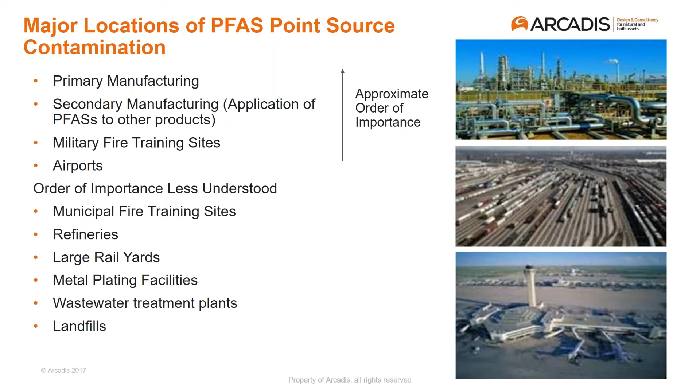The PFAS class is basically two components. The first are the perfluoroalkyl substances, meaning those compounds don't contain any carbon-hydrogen bonds—all have been replaced with carbon-fluorine bonds. We generally refer to that group as perfluoroalkyl acids, because there tend to be two main types: perfluoroalkyl sulfonates and perfluoroalkyl carboxylates. There are a couple of other lesser known varieties, but those are the two big ones. They contain a fully fluorinated carbon functional group, which can be either linear or branched depending on how it's manufactured, and then end in either a carboxylate or a sulfonate functional group.

We refer to them typically by their anionic names because they tend to be anionic at environmental pH. Sulfonates have pKa's thought to be lower than 0—they're kind of challenging to measure. Carboxylates have pKa's lower than 3. So generally speaking, they're pretty much anionic at environmental pH.

Historically, the PFAS that contained 8 carbons were manufactured in the greatest quantities—that's the C8, the octane. The third, and sometimes fourth, letter in the PFAS acronym usually refers to the number of carbons present in that molecule. So if we're talking about PFHxS, we're talking about a compound with a hexane or C6 group. With PFBS or PFBA, we're talking about a compound with a C4 group, for butane.

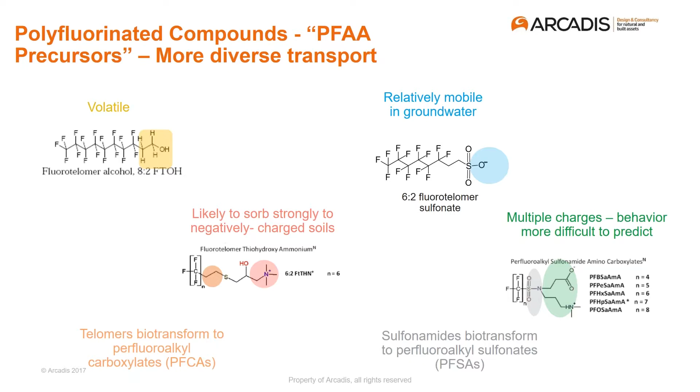So I did just want to quickly highlight how we measure the precursors in particular. The perfluoroalkyl acids are generally all pretty easy to measure on an LC tandem mass spectrometer. That's how commercial labs and academic labs typically measure those compounds.

It can be harder to measure the precursors due to that wide variability in structure, and also because many of those precursor compounds, the polyfluorinated compounds, are proprietary, and you can't buy an analytical standard for them.

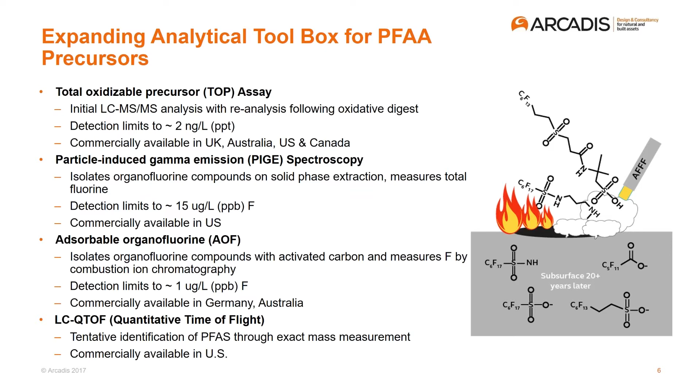Generally, the global trend is to see that more compounds are being regulated and at lower levels. Typically, we're somewhere between 10 and 100 ppt for a lot of these compounds, ppt or nanograms per liter.

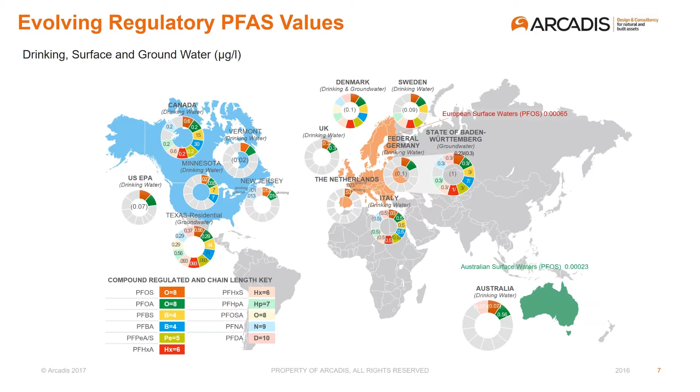So when thinking about remedial treatment technologies for PFASs, there are a number of challenges that are beyond what we've experienced with other kinds of compounds that we as an industry have tried to treat in the past. That makes it an area of a lot of academic interest. There's a lot of opportunity to develop new treatment strategies. And then it's also an interesting place to work as a consultant.

Sorry, let me just pull that thing off my screen.

So generally speaking, chemical treatment strategies have not been very effective for PFASs. Neither the carboxylates or the sulfonates react at all with conventional AOPs, with hydroxyl radical. Under limited circumstances, we've seen persulfate-related radicals be effective at treating the carboxylates. And then because these molecules are already so oxidized, sometimes there's potentially a way to work in an advanced reduction process to treat these compounds chemically, but generally speaking, these are not very viable at the field scale.

At the field scale, there's a lot of different scavengers that will react with electrons and other reducing agents before the PFASs would.

Biologically speaking, PFAAs are completely resistant to biodegradation. We have seen partial defluorination of polyfluorinated compounds through microbial processes. You maybe see 2 or 3 carbons defluorinated. That's of use when we're talking about this bioaccumulation concept, and if you can partially defluorinate a C8 precursor to a C6, that can be useful because it then becomes a less bioaccumulative terminal compound.

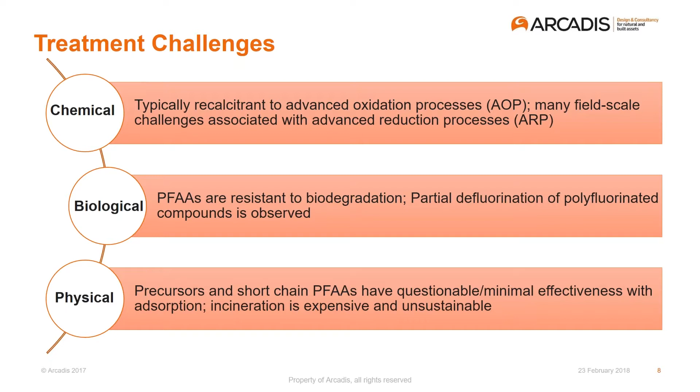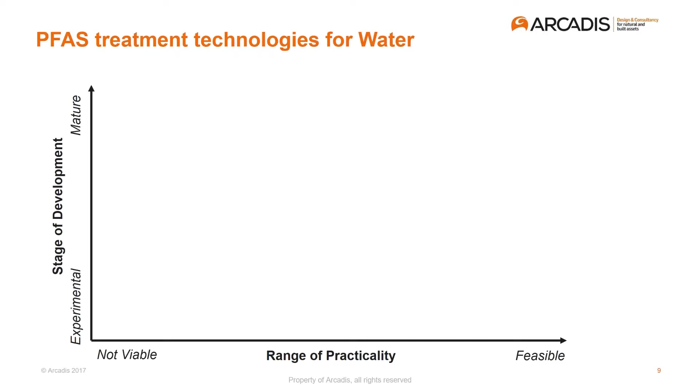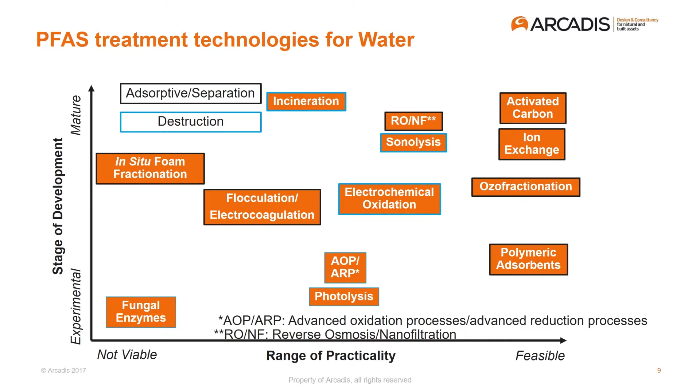This has been used for a lot of other kinds of contaminants historically, and it's a way to essentially immobilize PFASs rather than destroying them, but it can still result in that effect of protecting a water supply that we're usually interested in.

And then soil washing is another thing that hasn't been used much for PFASs, but has been used for other kinds of chemicals. It's sort of like what it sounds like, where you apply some type of a solvent or another pH-adjusted reagent to a bunch of soil, and you try to remove the PFASs through a separation process. And incineration is still often used to treat PFASs in soil, just because of the state of maturity of some of these other technologies.

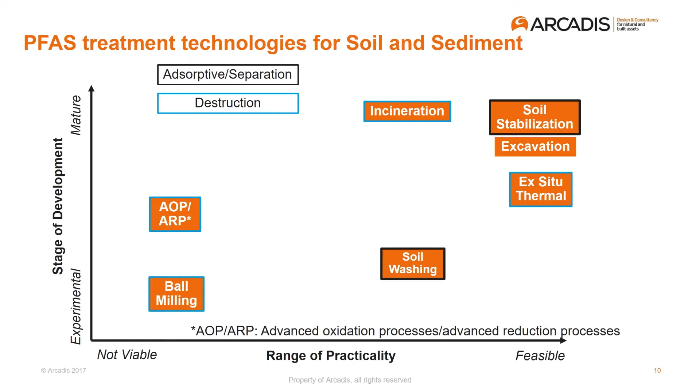SERDP is one of the main funders of research around PFAS remediation. SERDP is associated with DoD, and the main reason why they've taken such an interest in PFAS is because they have a lot of firefighting foam related contamination at different installations. So some of you may currently work on SERDP funded projects.

I just wanted to highlight what they've been funding in recent years, in 2018. And I think that gives you an idea of what people consider viable in the PFAS treatment and remediation space. Of the 11 or 12 projects funded for fiscal year 2018, a total of 7 had to do with either novel adsorbents.

There's some promising cyclodextrin type sorbents, another type called Purasorb that we'll be presenting on, and also sorbents related to ion exchange and regenerating those so they can be reused. Less of an emphasis on destructive technologies - 1 project on UV-induced defluorination, and then 3 on electrochemical-based destruction.

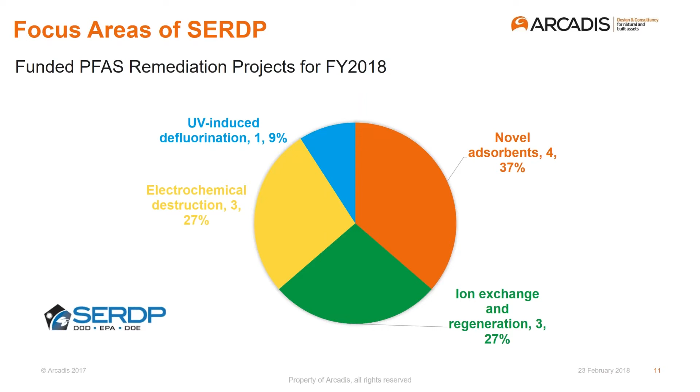Finally, before we move into a more detailed discussion of the treatment technologies, I want to emphasize that a really important part of any kind of remedial strategy implementation is locating where exactly the PFAS mass is. Locating where the PFAS mass is a very important element of the strategy. And a lot of times you need to think about what was the release mechanism.

If it was a surface release, you may have a lot of PFASs situated in your unsaturated soil zone. That can then impact the groundwater column through infiltration. If you have an aerial deposition type of release or discharge from treatment plants, that could impact more easily a surface water type of source.

One thing I wanted to point out with these soil and groundwater depth profiles, this was a site where we did a pretty detailed investigation, and we saw that while our main concern was groundwater moving offsite with PFASs and impacting a drinking water supply, most of the PFASs were actually hung up in the top of the surficial soil. 98% of the mass was actually in the top 2 meters of the site.

So even though our main focus was dealing with the groundwater, you have to consider what's going on with the surface soil, perhaps as a way to get to the groundwater treatment strategy. Every site's a little different. Depth of groundwater matters quite a lot. What the geology at the site is matters. Understanding those kinds of things can really help tailor the right strategy for PFAS treatment.

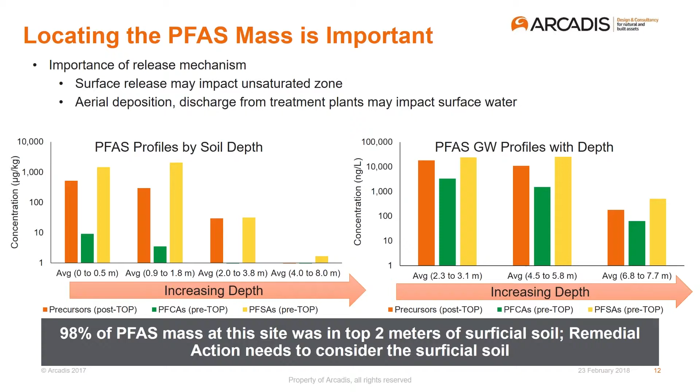So we're going to focus on 3 different categories of PFAS treatment: the first being adsorption separation, second being fixation, and the third being destruction. I'm going to talk to adsorption and separation, and Jeff will talk to fixation and destruction.

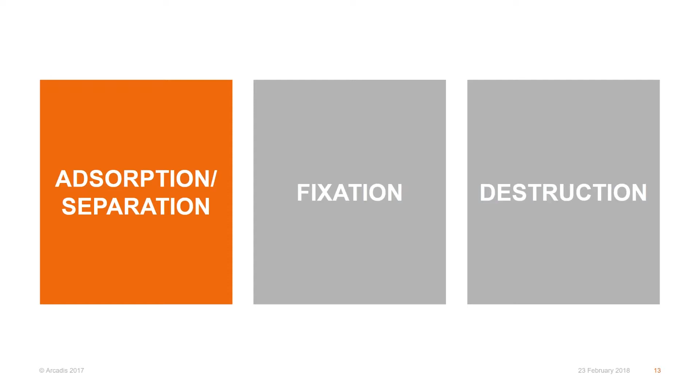So we'll start with activated carbon, which is the most popular type of ex-situ treatment strategy to use for PFASs. It's effective for surface water, groundwater, also drinking water. Point of entry systems are when you apply it in someone's residence. We know that it works really well for removing PFOS and PFOA, with greater than 90% removal even at very low concentrations, and with a 7 to 15 minute empty bed contact time.

You can potentially reactivate GAC. You can return it to the manufacturer, they can regenerate it at a high temperature, and then you can reuse it, which can improve the overall sustainability and cost.

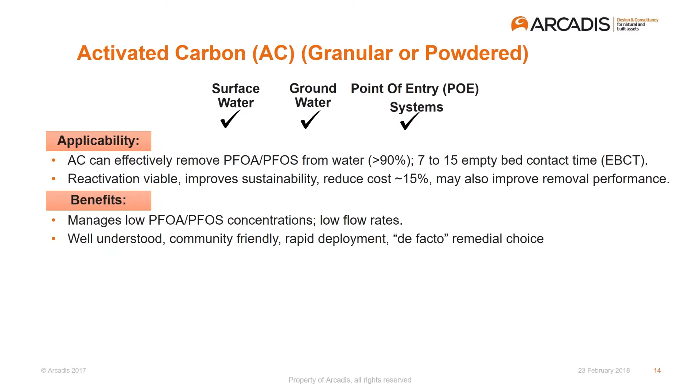Essentially, it's pretty easy to use, so it's an easy de facto choice. Some of the limitations are that it doesn't perform as well for some of the short chain PFASs, and with the precursors, it's even less well understood how well GAC is going to do. So in terms of selecting a comprehensive remedial strategy, GAC does have some limitations, and there's also competition for sorption sites with natural organic matter and other co-contaminants.

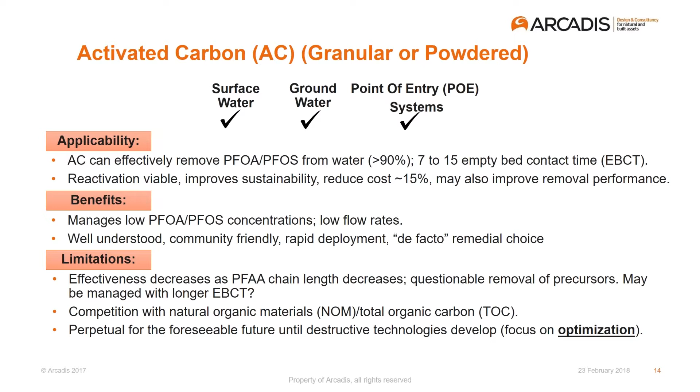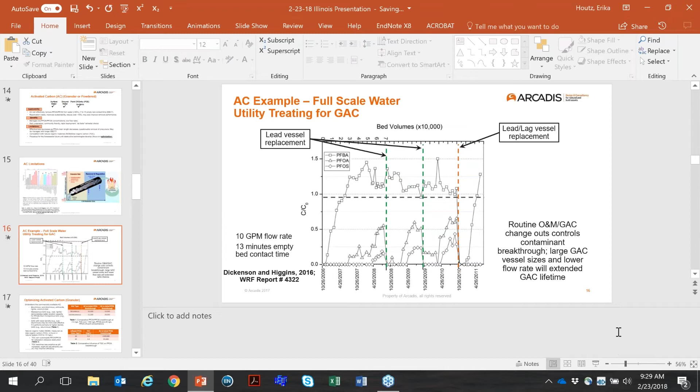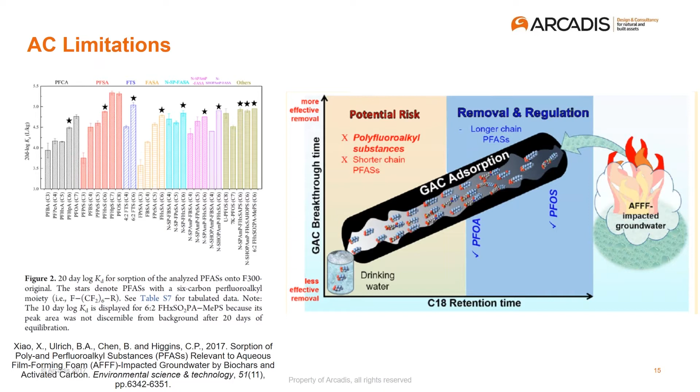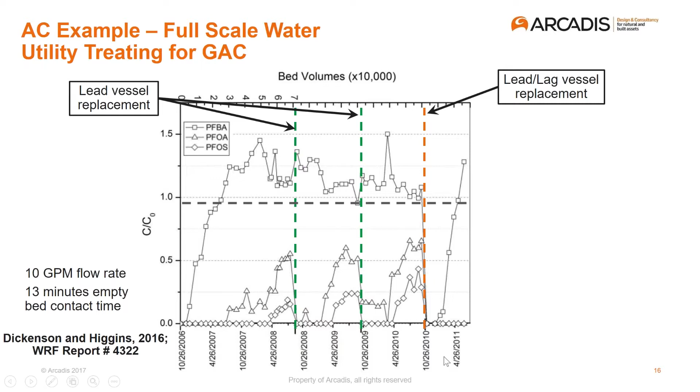Different things can be used to optimize how you think about the sustainability of a GAC treatment process. It has a lot to do with how you size the vessels and how often you're doing operation, maintenance, and change outs, also the type of GAC you select. There's different kinds of granular activated carbon available, a bunch of them coal-based, some coconut shell-based. Generally speaking, we see that mesoporous GAC performs better for PFASs than microporous GAC, so that can be a decision point to find a more effective strategy.

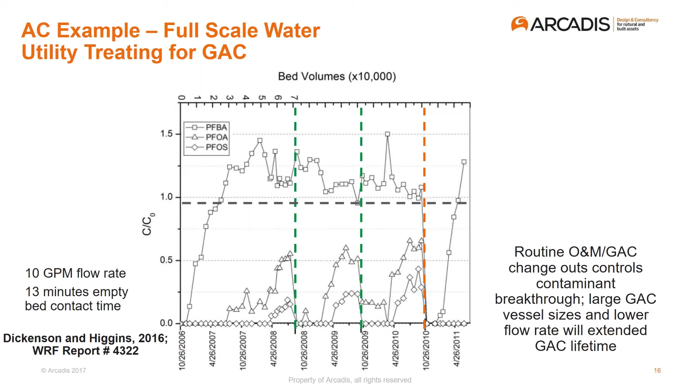Also, sometimes it's really simple things, you can purchase a subbituminous GAC. We see that bituminous and subbituminous GAC perform pretty similarly in terms of breakthrough before they need to be replaced, but subbituminous may just be more cost effective because it's less dense, and usually you buy GAC on a weight basis.

So thinking about how to control TOC going into one of these systems is helpful. You can do that through pH adjustment by increasing the pH. TOC will be less responsive to sticking to the GAC, but that won't actually affect the PFAS. Additionally, you could pre-treat through flocculation or through some type of advanced oxidation process, which would be effective towards TOC and co-contaminants, but probably wouldn't really impact your PFAS.

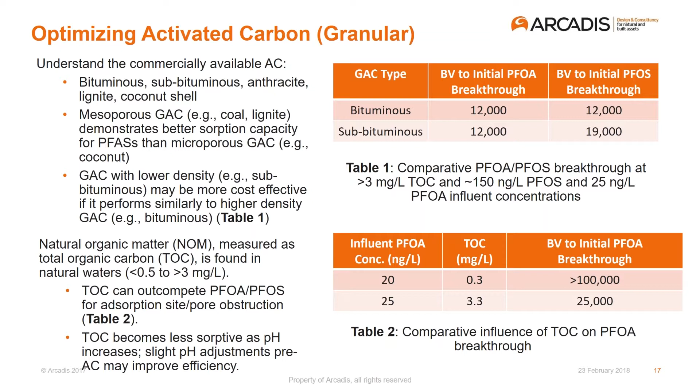Another thing you can do to optimize your use of activated carbon, if you have a really highly concentrated influent stream, you can use a PFAS-specific flocculation and precipitation technique to bring down the concentration of PFAS before hitting the GAC. The problem is then that you have a secondary wastewater or waste stream, and that really only works if you have a very concentrated sample, like more than 20 parts per billion, which is higher than what you would see at most sites where we're dealing with this. So it's just thinking about what your treatment train looks like, how to extend the longevity of what you've chosen. In this case, we've been focusing on activated carbon.

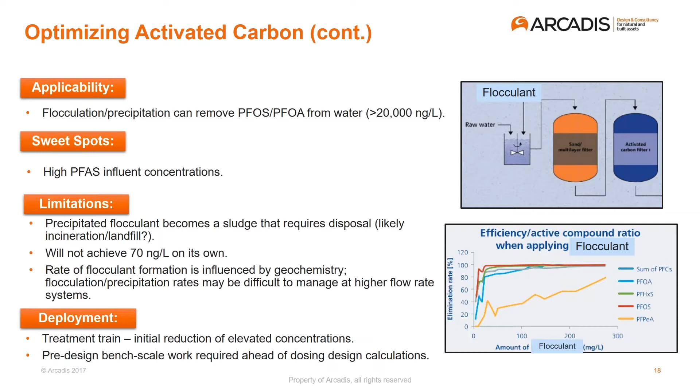Another thing that's really more of a practical, functional idea: if you're focused on controlling costs for treating for these compounds, sometimes simply by investing in a higher capital cost, so a 10,000 pound set of GAC vessels versus 2,000 pounds, you can have a similar lifetime O&M cost, which can be useful, particularly if you're trying to deal with a system that's in a remote location or where it's difficult to mobilize people to get to. It can be useful to invest more upfront in a larger system that requires less frequent change-outs.

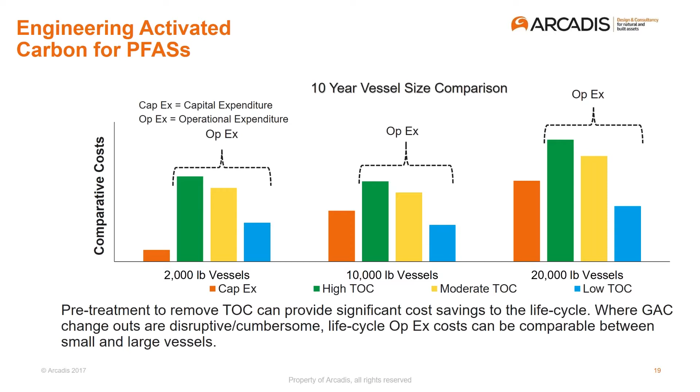So soil washing is another separation technique used for soil treatment. Generally speaking, this is only something you would want to deploy if you had a relatively large quantity of soil you wanted to treat. There's different things you can use to do soil washing. You can use a surfactant that could potentially desorb PFASs. You could use a solvent such as methanol. Again, there's variability in how different PFASs sorb and desorb, so getting everything at once can be a bit of a challenge. And then you do have a waste stream that requires treatment after that, but that can be a more concentrated waste stream, which is often easier to treat from a destructive point of view than low concentration waste streams.

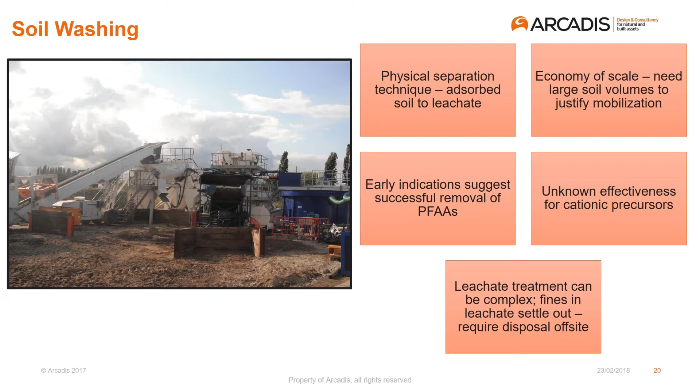Another type of separation technology that's used is typically anion exchange. That's because PFASs are typically anions. Even though the technology sounds like it's all about ionic effects, actually the hydrophobic interactions matter quite a lot. So the longer chain compounds tend to perform a little better with removal by anion exchange than the short chain ones, although this can be a more effective way to treat ionic PFASs that are shorter through that additional ionic interaction.

And so typically where we're seeing anion exchange resins used is a polishing step after GAC treatment. Anion exchange resins tend to be quite a bit more expensive than something like activated carbon, so they can be used to get down to really low treatment targets that some people are trying to achieve. They also have smaller equipment footprints, lower empty bed contact times, so they can be a little more versatile in that way to deploy as a full-scale system.

But similar to GAC, sometimes you have to think about optimization, and depending on what other kinds of anions are present in your source water, that may be a limitation towards being able to use different kinds of anion exchange resins. One thing that appeals to a lot of people about using anion exchange resins versus something like GAC is that if you can desorb the PFASs using a solvent or a pH adjustment effect, you can really extend the longevity of the resins for lifetime of treatment. But again, you have a waste stream you have to treat.

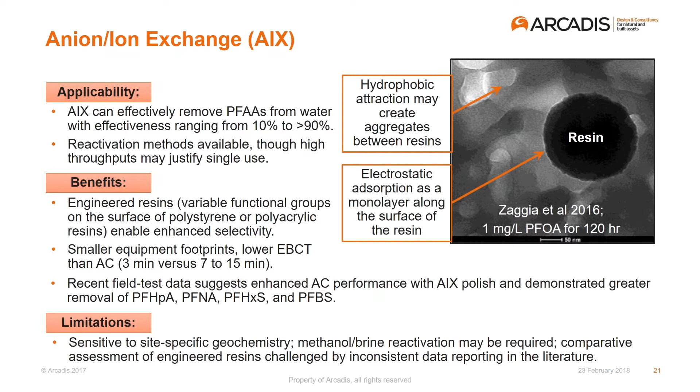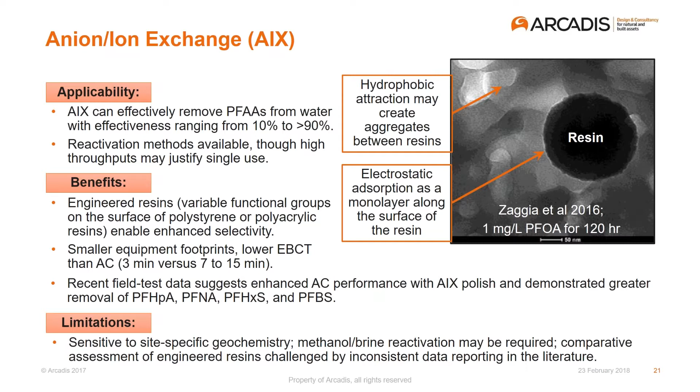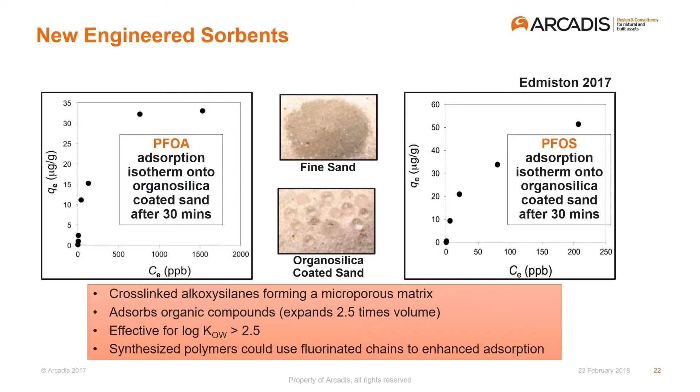You can also modify this material with different fluorinated functional groups that can improve its affinity for PFAS. This is a focus of a funded project we're working on now, trying to improve this sorbent for removal of PFAS. Part of that is also focusing on regeneration potential of this sorbent. That's an area of really active research, just trying to understand how you can improve the longevity of these different kinds of materials.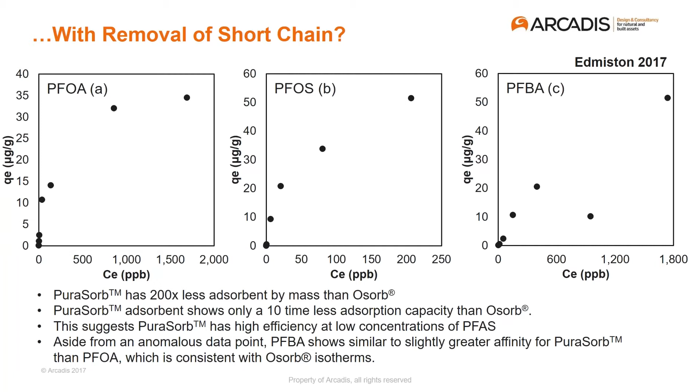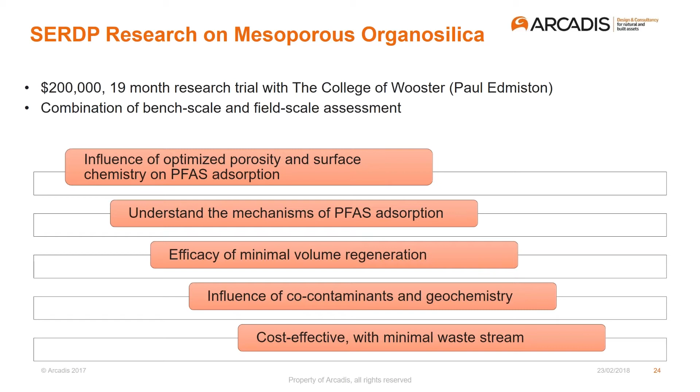Another separation technology we've used predominantly in Australia is a concept called ozofractionation. We've been using it with wastewater, so really high organic content and a lot of other co-contaminants. Ozofractionation was originally not designed for PFAS, but for other kinds of contaminants such as hydrocarbons that can actually break down with ozone.

But the nice thing about using ozofractionation is that by exposing a waste stream to ozone, you get both destruction of your co-contaminants, and then you get a bubbling effect which works really well to separate out PFAS that tend to be surfactants. By separating out surfactants into the air phase or bubble phase, you create a concentrated waste stream of PFAS that you can then treat separately.

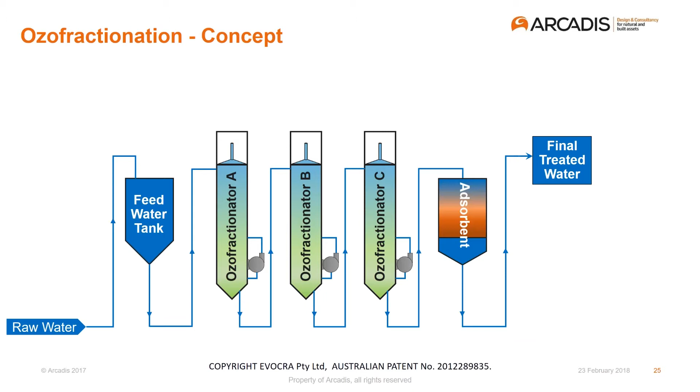So the feed water goes through 3 different ozofractionation tanks. Each time the waste stream comes out at the top, the airy waste stream, and then the treated stream, which goes through each of these different fractionators, is finally treated with an adsorbent to get down to really low levels of PFAS to meet discharge requirements. So you end up with a concentrate, some spent media, and a foamy sludge on top. That's the concentrate. Then also your final treated water.

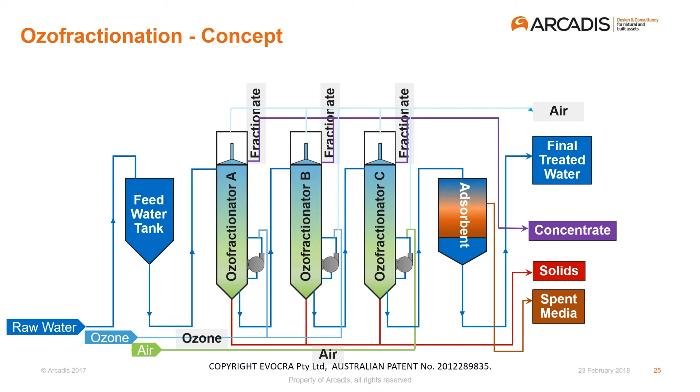So we got this to work in partnership with a company called EVOCRA at the lab scale, and then brought it to the field scale to treat 3.6 million gallons of water at this particular site.

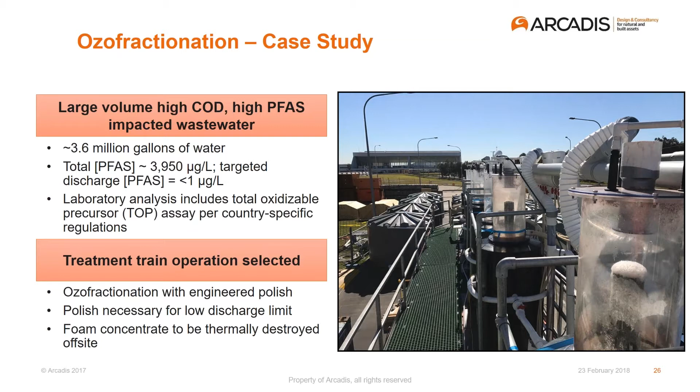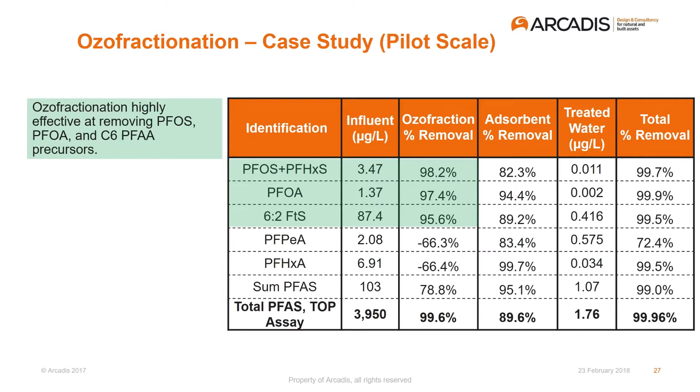So this was the removal we achieved. In the ozofractionation stages, we were able to achieve between 95 and 98% removal of a lot of our target compounds - PFOS, PFOA, 6:2 FtS. Ozofractionation did not work as well for the short chain compounds. You actually see net production, because the ozone converts some of the precursors in the process to these short chain compounds. But by applying an adsorbent like Osorb or PuraSorb in the polishing stage, you can get additional removal to get much closer to your target discharge value.

So in total, we saw 99.6% removal of total PFAS as measured by one of those alternative techniques, TOP assay. In the ozofractionation stage, an additional 89.6% removal from that adsorbent stage. We were able to take the influent to effluent treated water from about 4,000 micrograms per liter to about 2. This was at the pilot scale.

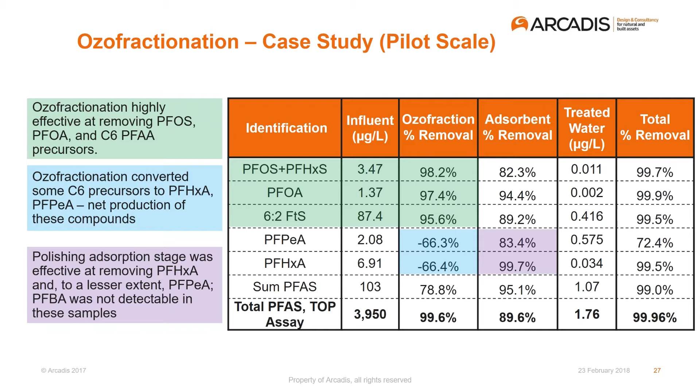With the full scale water, which was not quite as contaminated as that pilot scale water, we were able to get below our discharge limit of 1 microgram per liter, or 1 part per billion. We replaced the polishing step in the full scale system with nano-filtration just to ensure we could meet our desired discharge limits. We ended up with a concentrated waste stream that was about 0.5% to 2% of the treated water volume. By really concentrating those PFAS into a much smaller waste stream, that makes it more viable to start using some of the more expensive destructive techniques that work much better cost-wise at a more concentrated level.

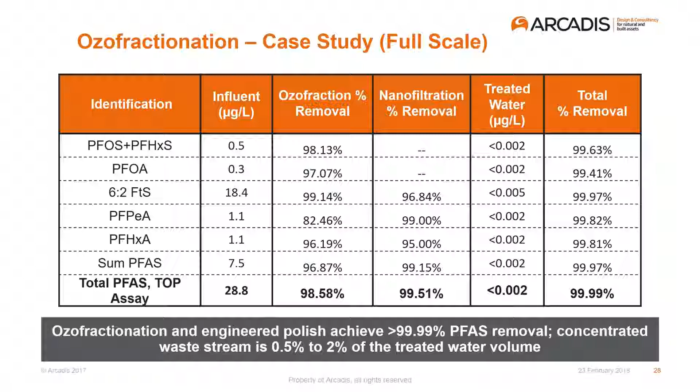I'm going to talk about fixation and destruction-based technologies for PFAS. A lot of what I'll present is conceptual, which is why we're evaluating it, because there hasn't been much action by industry to actively remediate these compounds yet. A lot of what Erika talked about are stopgap measures put in place to address immediate concerns to public water supplies. This next section focuses more on what people are thinking about doing to address this problem. Right now we're catching it and building research as to what we can do. The first technology I'll talk through is fixation.

One way to distribute them effectively is to destroy the soil structure with in situ mixing, called soil stabilization, using a variety of tools. There are different technologies out there, variations of augers, excavator arm attachments, and things like that, that destroy the soil structure and ensure we can deliver the reagent throughout. Potentially solidification as well.

Some areas we're looking at treating are abandoned fire training areas that don't have much traffic, so it's not necessarily required that the soil be immediately returned to load-bearing capacity. The solidifying agent, like Portland cement, gives unconfined compressive strength for immediate use after treatment, but that may or may not be necessary. It's important because some of our research looks at how the aluminum silicate chemistry associated with Portland cement influences the fixation strategies.

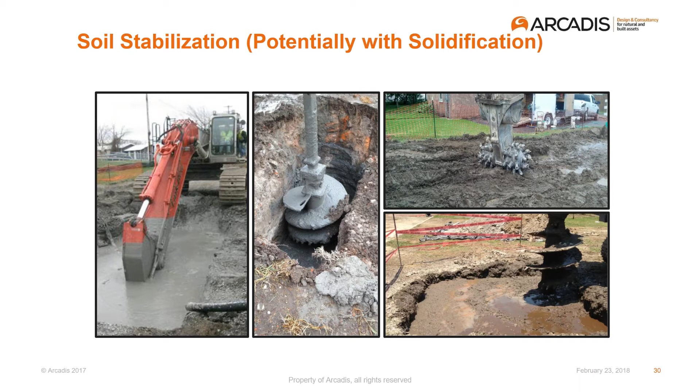From a leachate perspective, if these fixants were mixed into an aquifer, into a soil water slurry, we would effectively mitigate the leachate from the soil to the water. So you're not destroying them or removing them, you're locking them in place and preventing them from getting into groundwater, which would become a mobile problem. It's about managing the risk and taking the receptor out of the equation, because people aren't interacting with these soils.

They're restricted under institutional controls, or a lot of our clients are considering using soil stabilization in a fire training area and then building another fire training area on top of it, using a different variety of foams that don't have the fluorosurfactant. But the real question is how effective this will be long term. If you talk to vendors who provide these materials, they advertise 10,000 years of longevity, based on simulated leachate testing. A lot of the commercial leachate testing, the synthetic precipitation leaching procedure and the toxicity characteristic leaching procedure, SPLP and TCLP, were designed historically for metals leaching from landfills.

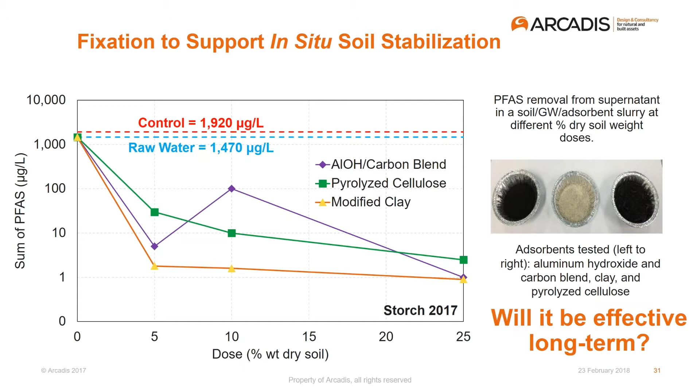Typically you don't think of soil stabilization with time series data. It's generally set up so you demonstrate viability in bench and column studies, establish a technical quality control and assurance plan to make sure the field scale mix is identical to the laboratory mix, and that's your proof of concept—you don't further sample the monolith. That's typically how ISS systems work. You may monitor groundwater for subsequent leachate, but you generally don't go back into the monolith to disturb it.

We're going to do that because in this instance it's not a destructive-based treatment—we're trying to see if we've mitigated leachate. So we'll mix in whichever stabilizing agents we see fit based on laboratory bench scale work, and run four sampling events over 3 years, generally annual sampling plus a baseline event. We'll look at PFAS in soil and groundwater, and use Erika's method, the total oxidizable precursor assay, to look at how precursors are influenced by adsorption.

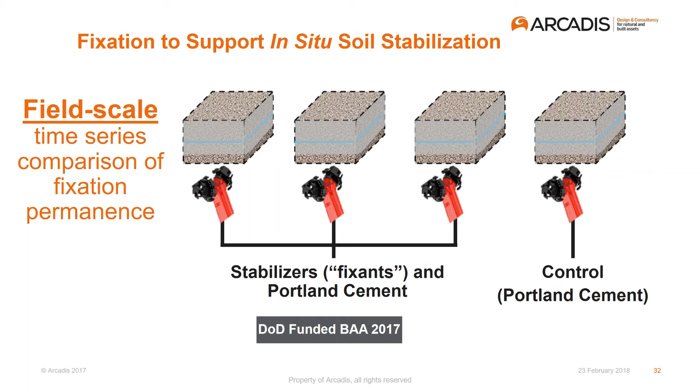Organic carbon is a big factor in adsorption, and it competes with the fixants we're mixing in. We'll also look at target analyte list metals, grain size from a geotechnical perspective, moisture content, and other major anions and cations in groundwater that can influence the adsorptive nature and fixation ability of the fixants we're mixing.

And we're going to use a slightly different version—not TCLP or SPLP. We're using a sequential leaching test called LEAF, method 1315, developed with Arcadis and Vanderbilt University, and since commercialized. It uses a circumneutral leachate extractant to run intact monoliths through a series of leaching steps. It's the most accurate way to represent what the field scale will actually be subjected to over time, and doing it at circumneutral pH gives us a worst case scenario from a PFAS leachate perspective.

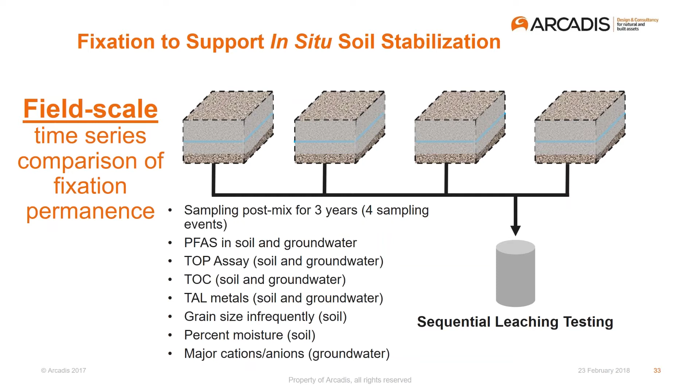I'm going to end here with some discussion on destruction. Now with destruction we start to get into somewhat more science-fiction-y stuff—technologies that may have been evaluated for hydrocarbons or CVOCs back in the 90s and 2000s, which people kind of laughed off because of their energy-intensive nature. So I'm going to talk a little bit about them.

The first one I want to talk about is the one everyone asks about: why doesn't ISCO work? Why doesn't chemical oxidation work? ISCO is the big hammer, one of the most powerful chemistries we can generate in bottles and at field scale, but there's minimal promise with ISCO. I jokingly refer to it as NISCO or ISNO because it's not applicable, and I'll explain why. But some literature suggests that under pretty extreme conditions of generating advanced oxidative processes, those radicals that perpetuate radical mechanisms may be effective on the perfluoroalkyl carboxylic acids Erika was talking about earlier.

But maybe not so much on the sulfonates. However, some of the aggressive chemistry necessary to destroy the PFCAs causes acidic pH, and that acidic pH can start to infringe upon the acid dissociation constant of the perfluorocarboxylic acid. Once you get down around pH 3.5, you can start to protonate some of the perfluorocarboxylic acids, and that increases their volatility. So are you really destroying them, or are you driving the acidic conditions so low that you're driving them off via volatility?

I think that's an area of study and research in the literature at the moment. There's certainly a potential to transform precursors to perfluoroalkyl acids via ISCO—that's the whole concept behind the TOP assay.

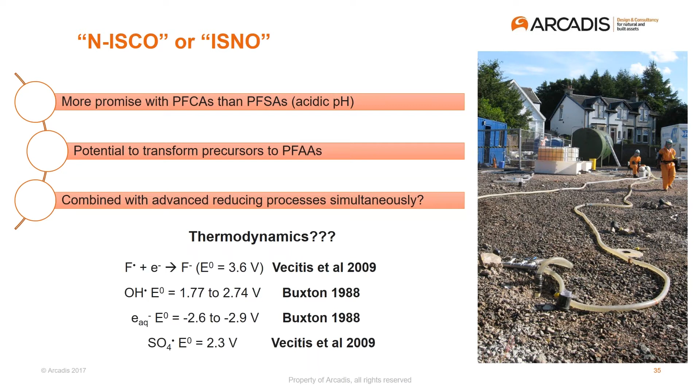And then if you look at the kinetic side, the rate constant is on the order of 10 to the 6 to 10 to the 10, second order, that's how these radicals react with co-contaminants or other geochemical scavengers. The rate at which it reacts with PFOA from this specific study in 2009 is on the order of 10 to the 5. So we're already behind from an energy perspective, and there's stuff that can consume it much more quickly than the radicals will react with the carboxylic acid.

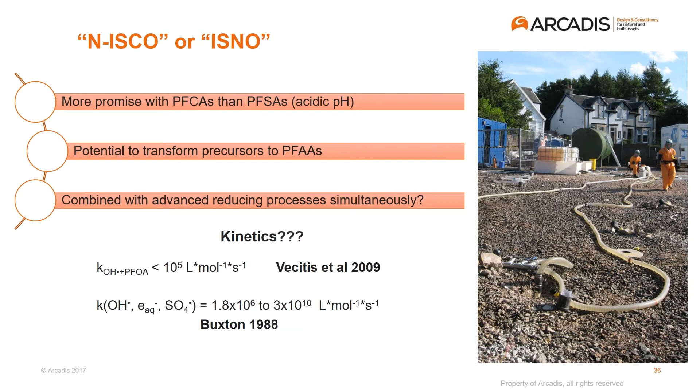Sonolysis is something that's pretty promising in the literature. If you're not familiar with it, the brief definition is passing sound waves through water to facilitate microbubbles, and then through the successive frequency of those sound waves passing through the water, the microbubbles are both stretched and compressed at an extremely high frequency such that the bubbles begin to collapse, and that's called cavitation. When that happens under normal pressure conditions, the temperature can go significantly higher, as high as 5,000 degrees Kelvin.

That can facilitate either thermal degradation or pyrolysis of the PFAS. And as Erika pointed out with the ozofractionation technology, the fluorosurfactant nature of these compounds means they're drawn or partitioned to the surface of bubbles. So when we're generating super high temperatures in proximity to bubbles, and we have contaminants that like to partition to bubbles, we can get thermal destruction just via ultrasound application.

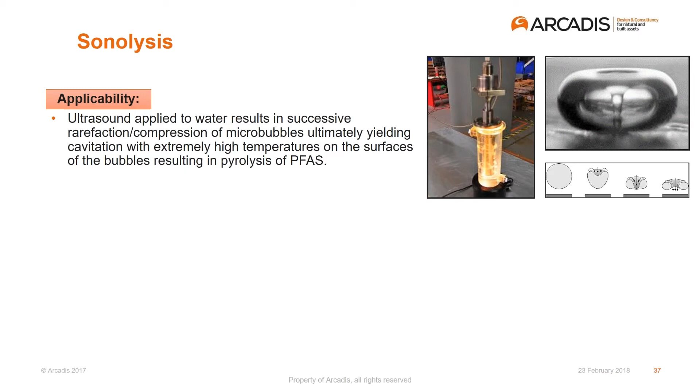The benefits: it's been demonstrated in the literature, and there are some options of green energy sources to power these units. The energy consumption can be a significant limitation associated with sonolysis when you try to apply it to field scale. But in the absence of chemical destruction and biological destruction, this could be an option for treating concentrated wastes where we can control residence times and circulation.

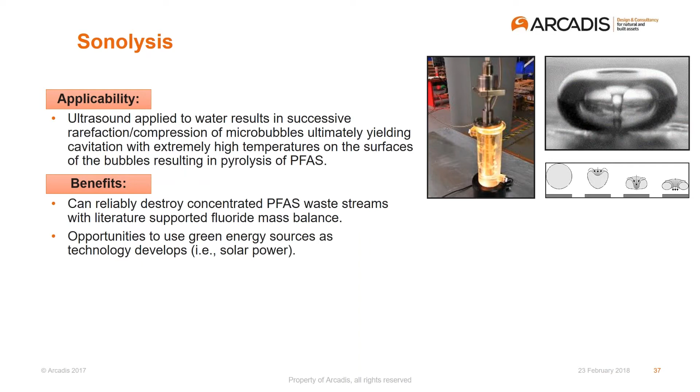Some of the limitations: typically the sulfonate is a little bit more challenging from a rate constant perspective, meaning it requires more time and energy. The effectiveness of sonolysis in the literature hasn't really been demonstrated down to the levels we'd need from a health advisory level perspective, like tens of parts per trillion. But if used in a concentrated waste treatment perspective with circulation to reconcentrate, that's its sweet spot.

It's not, like Erika said earlier, something we're going to apply to a 1 million gallon per day system. That doesn't make sense from an economics or feasibility perspective. But if we can concentrate and sweeten the load down to a point where we can control the circulation rate, then there's some viability. But the energy consumption is a lot.

Look at the graph on the right there. That assumes about $0.12 per kilowatt hour and an operation of about 10 hours per day. What we're seeing from application energy and energy consumption from sonolysis is that it's about 0.3 kilowatt hours per liter treated. So if you've got systems anywhere from 0.05 all the way to 500 gallons per minute, you can see that's a log scale of those costs from 10 hours per day. That's a lot of money to run electrical for a sonolysis system.

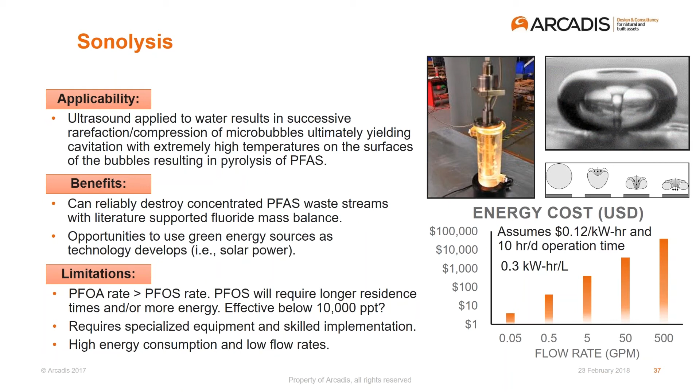So the focus again on this technology is concentrated volumes, or really high concentrated low volume treatment. The next one I want to talk about is electrochemical treatment. This is one that's being commercialized. There's a few people who provide these reactive anodes, but essentially electrochemical oxidation is the direct electron transfer of the solvated electron from the surface of the anode to the PFAS.

So it's an advanced reducing process, but we don't really have the ability for the solvated electron to be scavenged because it's being directly passed to the PFAS that has adsorbed or partitioned onto the surface of the anode. So it's a direct electron transfer.

The effectiveness has been demonstrated pretty widely in the literature. There's a bunch of publications since about 2015 until present that have started to evaluate electrochemical treatment. I'm specifically saying electrochemical treatment and not electrochemical oxidation, because there's research showing that the hydroxyl radical generated when electricity is passed through water, facilitating the disproportionation of water into solvated electrons, hydroxyl radicals, and hydrogen radicals, those oxidative mechanisms are not as effective as the reducing mechanism, the direct electron transfer. So I specifically call this electrochemical treatment.

The plot on the right shows some effectiveness, and what it gets at is the sweet spot for this technology. Just like Sonolysis, it's for high concentration, low volume waste. The used power is presented on the x-axis, and the resultant decrease in PFAS, sum of PFAS, is shown on the y-axis.

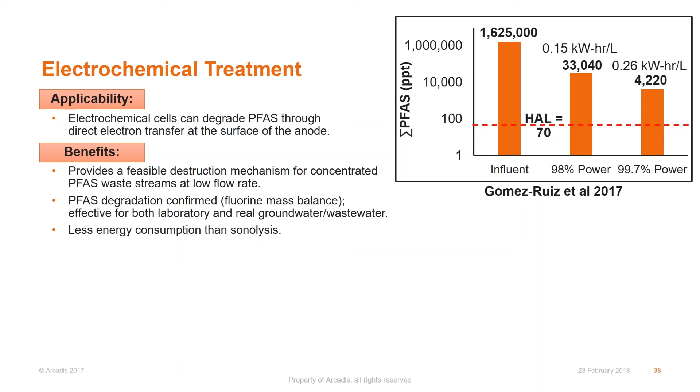So if you're treating a waste that has chloride or bromide, you have the potential to generate perchlorate or bromate. Those are secondary water quality compounds that have regulatory limits, and they basically need to be treated. So the best practice for PFAS treatment is a treatment train. If you do go the way of electrochemical treatment, there are resins and anaerobic digesters to handle some of the products you'll generate, but that's a cost and consideration that needs to be included.

Last thing I'll say on electrochemical treatment is that the acidity around the anode provides an adsorption site, particularly for PFOS, but also for other perfluoroalkyl acids. That gets back to the discussion on fixation, that when you have anions and a positively charged anodic surface, you can get adsorption. There's been some publications to suggest that the fluoride mass balance maybe didn't add up perfectly from a treatment perspective. So could it have been some adsorption of the PFAS to the electrode?

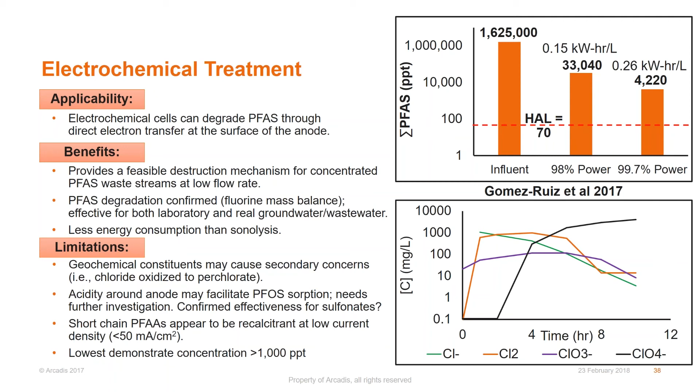So in summary, to wrap this up, Erika did a wonderful job explaining the recalcitrant nature of PFAS, the precursor loading. It's a very complicated issue, and developing a remedial strategy that's all-inclusive is probably not going to happen.

The best practice right now is treatment train, because we're catching it with adsorption and trying to find the best way to manage the adsorbents. But the concept is to take the high volume, low concentration waste stream and change it into a low volume, high concentrated waste stream, and then focus your energy on a lower volume at a rate you can control. Everything is very much treatment train, and optimizing GAC or ion exchange, whatever we're doing, is focused on multiple components of a treatment system.

The destructive techniques are very much in development. There's ones being generated all the time. Some great work at Clarkson University on plasma generation that the U.S. Air Force is teaming on with them. It's promising, but when you start talking about plasma and bringing electrochemical treatment or Sonolysis into the field scale, there's going to be some considerable scale-up issues that we're going to have to wrestle with.

The one slide that Erika presented about life cycle costs and evaluating that from some adsorption-based remedies, it's very important to understand that the quick fix IRMs that we're putting out come with a life cycle price tag. So it does make sense to run the engineering cost evaluation up front to find out what that's going to look like.

It's behooving upon all of us in this industry to not abandon the institutional knowledge we've gained over 40-some years of remediation experience. If we're doing groundwater extraction, we don't want to go back to pump and treat remedies with GAC adsorption that doesn't work. We've got many new ways of implementing in situ techniques, and a lot of great ways to optimize GAC that we've learned along the way. I'd encourage all of you to focus on not abandoning that institutional knowledge. Thank you very much for the time to present to you guys today.

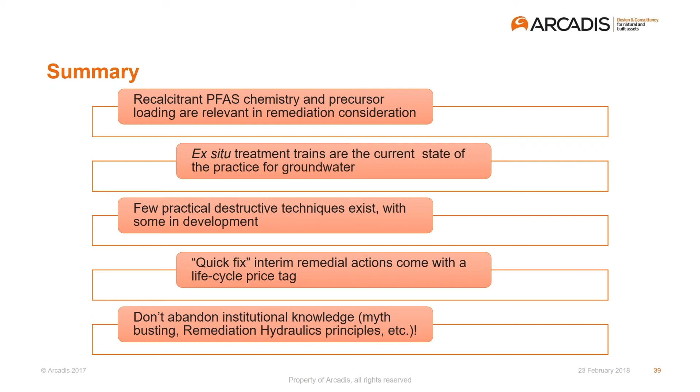Do we have any questions from our audience here? Yep.

I've got a question related to ultimate destruction via incineration. If you incinerate an activated carbon that has the compounds adsorbed to it, what's the ultimate fate of the fluoride, and is that acceptable environmentally, or does it cause another problem downstream? It would seem like even for the destructive techniques you mentioned, you're either going to end up with fluoride in the water or fluoride in the air, or some combination of both. So what is a truly destructive technique or an ultimate outcome that's acceptable for the material?

It's a great question. I can start, and Erika can answer anything else I miss. I'll handle the first part about incineration of activated carbon. Activated carbon was never necessarily meant to be incinerated. The reactivation process occurs at a temperature commensurate with PFAS destruction, but the GAC doesn't get destroyed. You might lose 15% to char, but the reactivation process is at a high enough temperature that you'll separate and destroy the PFAS and be able to reuse the activated carbon.

One thing we're hearing from vendors, and it's a great question about the fluoride, is that it creates hydrofluoric acid that can be damaging to some of the ceramic kilns used to reactivate this carbon. So they've been using different scrubbers and vapor treatment techniques to neutralize and get the fluoride down to just aqueous fluoride. There are regulatory limits for fluoride, but the ultimate endpoint of PFAS destruction is mineralization of the carbon, or generation of sulfate, such that we're generating CO2, sulfate, and fluoride, which all have very different toxicological profiles than the PFAS themselves.